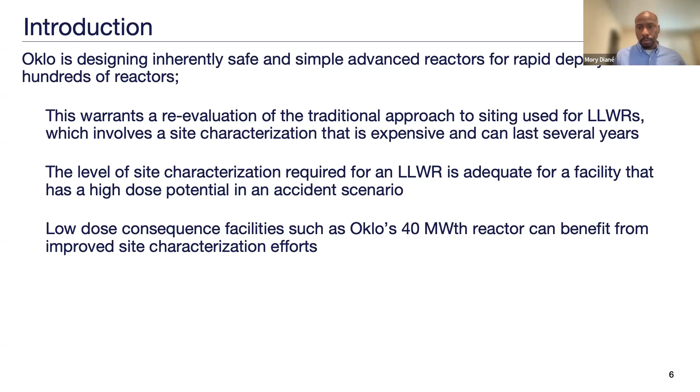However, for low dose consequence facilities, such as Oklo's 40 megawatt thermal reactor, those type of facilities can benefit from improved site characterization efforts. And we'll talk a little bit more later about the dose consequence. So Oklo's methodology was provided to the NRC via a white paper, which was submitted in November 2023, following several discussions and meetings that we had with them, and we also had some meetings after submitting the white paper. The methodologies provided in that white paper are focused on three key aspects.

Basically, the goal is supporting the safe deployment of Oklo's reactors to those who want and need clean heat and electricity the most. The criteria is ensuring seismic categorization and site characterization is commensurate with the reduced risk of the facility while ensuring compliance with the regulation. And as a result, we want to be paving the way for a flexible approach to siting, supporting the low dose consequence facilities due to their small inventory, passive safety, and also robust design.

And something I wanted to state before moving on from this slide is that there are precedents to the methodology that we presented to the NRC, starting with light water reactors' non-safety structures, systems and components, also for non-power reactors, research and test reactors, medical isotope facilities, which are all regulated by the NRC, and also DOE facilities, all of which follow a much more streamlined site characterization process when they have lower radiological risk, and this is adequate for their workers and members of the public.

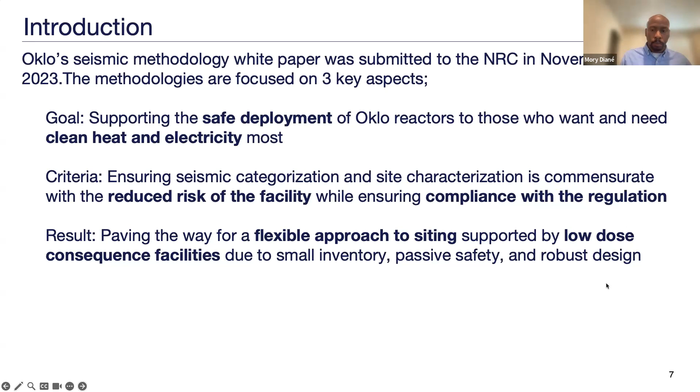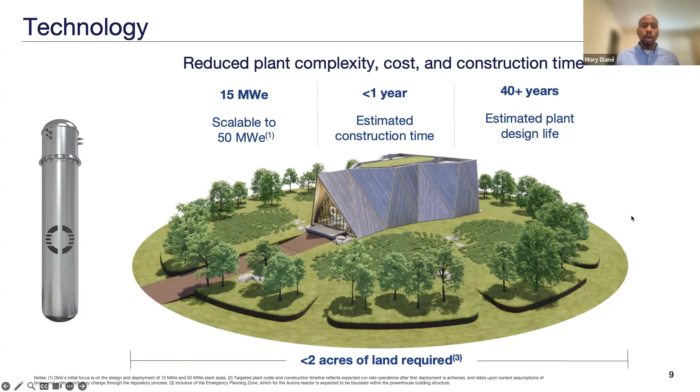Okay, so the technology that we're working on really helps reduce plant complexity, cost, and also construction time. We are working on a fast reactor design. So I'm going to move on to the next slide to give you an example. In terms of fast reactors, we have over 400 reactor-years of operating experience across the world. Oklo specifically uses data from the Experimental Breeder Reactor 2, that's EBR-2, which produced about 20 megawatt electric and was operated for 30 years by the Idaho National Labs, from 1964 to 1994.

The EBR-2 was a liquid metal cooled fast reactor, so it didn't use water as a coolant. This allows the coolant to operate at higher temperatures and lower pressures than current reactors, improving the efficiency and safety of the system. So fast reactors use a fast neutron spectrum, meaning that neutrons can cause fission without having to be slowed down first, as they are in light water reactors. This allows them to use both fissile material and spent fuel from existing reactors to produce electricity.

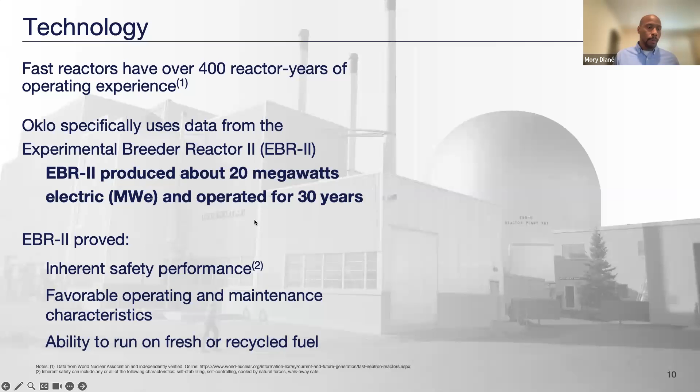So we'll go through the regulatory overview. Again, this is the part that we'll spend the most time on. We'll take questions at the end after I go through the regulatory overview and the Oklo methodology. So we'll start here with 10 CFR Part 50 Appendix S, which ensures that structures, systems and components subject to the safe shutdown earthquake, SSE, remain functional. The SSE is the maximum seismic acceleration the safety-related SSCs can handle without failing. This is the seismic design basis accident. It is not a beyond design basis accident. Essentially, safety-related SSCs need to remain functional when subjected to the SSE.

The next regulation is 10 CFR 100.23. That's the geologic and seismic siting criteria, which ensures seismic site suitability through site investigations that account for uncertainty to allow for the selection of the ground motion response spectra, GMRS, and the SSE. So the key difference here is the GMRS is the maximum acceleration that is specific to the site, while the SSE is the maximum acceleration that the design can withstand. The values do not have to be equal. But when they're not equal, the SSE must envelope the GMRS.

And then finally, we have 10 CFR 50.34, the contents of applications, technical information, which prescribes a dose threshold of 25 rem that should not be exceeded. This accounts for mitigation. So when mitigation is applied, that 25 rem dose should not be exceeded. That's within 2 hours at the site boundary. And they are within a combined license application under Part 52.

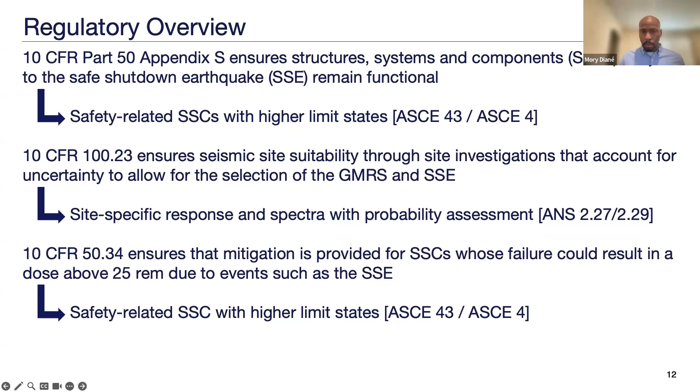All right, so here we wanted to talk a little bit more about the uncertainty piece. So we've quoted the portion of Part 100.23, 10 CFR 100.23, that talks about uncertainty. So we can see here that 100.23 wants to identify what the SSE is, but it wants to do it while accounting for uncertainty. And we can also see that there is a caveat where the probabilistic seismic hazard analysis is not a requirement. It is a choice that is provided because it says such as. So the alternative would be to use

suitable sensitivity analyses. Through our discussions with NRC, the recommendation that was provided was to perform PSHA, the probabilistic seismic hazard analysis, with a lower level SSHAC. Basically the SSHAC is the Senior Seismic Hazard Analysis Committee that would be implemented to perform validation and peer reviews.

So you have the different levels here that we showed. You don't have to read through all of that, but there's level 1 through 3, and then, I'm sorry, through 4. 4 is not shown on this table, but level 3 and 4 would be what a typical large light water reactor would be performing, and what NRC had recommended for a lower dose consequence facility through our discussions would be potentially a lower level, maybe level 1 or level 2.

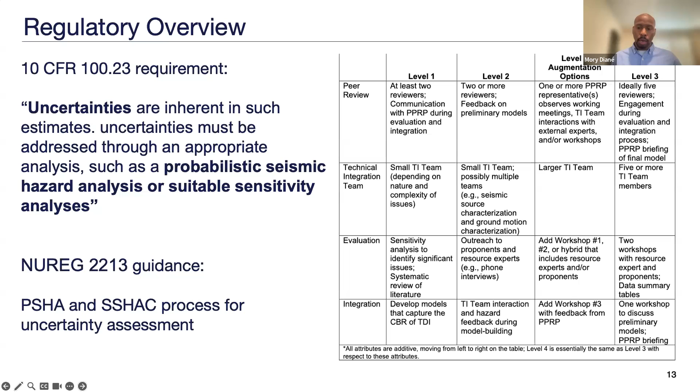Based on what we investigated, it was related to EPRI and Lawrence Livermore National Labs, LLNL, PSHAs that were performed that had significantly different results for the same area. And since then, NRC has wanted applicants to properly capture all levels of uncertainty, aleatory and also epistemic uncertainties. We'll go through more slides on the uncertainty piece, because that's very important in terms of how to characterize it.

So we have some quotes here from DG-1410. That's the seismic reg guide that NRC is working on. It's currently draft for Part 53, which really opens the door for a lot more options for reactors other than large light water reactors, because as we will see in some of the next slides, the current regulation, Reg Guide 1.208, is really focused on large light water reactors of a high dose consequence.

But the DG opens the door for potentially lower dose consequences, which can be handled through option 3. And we have a quote here. So this proposed option allows the use of a variety of performance and risk analysis methods besides a traditional SPRA to demonstrate seismic safety. SPRA would be the seismic probabilistic risk assessment. Typically, that's used to determine the safety classification, seismic classification of the structures, systems, and components, SSCs.

We also have within that guidance that option 3 would allow for a much more streamlined approach. So it says a combination of approximate bounding and conservative analyses and quantitative risk. So it's not prescribing an SPRA specifically. There's an alternative there.

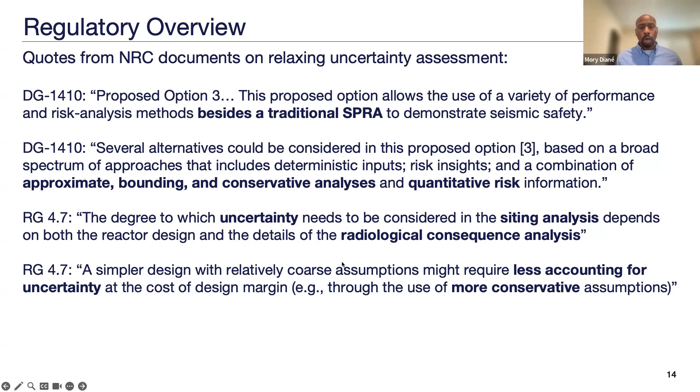And it says that this would be for the design of low-risk facilities, and it has in parentheses microreactors or special systems of relatively low risk, and the regulatory framework for them is evolving. So these are all providing some flavors that indicate that for a lower dose consequence facility, a different approach than what's been used for large light water reactors would be possible.

So we're now getting into the seismic design category. So the SDCs are a type of seismic classification that is assigned based on unmitigated dose potential for basically the failed state of the safety-related SSCs. This would be following American Nuclear Society Standard ANS 2.26-2004, which is the categorization of nuclear facility structures, systems, and components for seismic design. And this was last issued in 2017.

So here we're showing the different SDCs, 1 through 5. Again, 5 is what Reg Guide 1.29 defaults to for large light water reactors. And we have all the way down to 1, where 1 is 0 rem, and then you have 5 with 100 rem dose. So under the ANS unmitigated consequence analysis process, those will be the doses considered based on Appendix A. And you can see that this is unmitigated. However, the NRC dose threshold of 25 rem that should not be exceeded is mitigated. So it accounts for all mitigation.

So you can see clearly here that if you are an SDC 5 and you are at 100 rem unmitigated, then certainly you need to mitigate that to get much below 25 rem, as far below 25 rem as possible. So in that case, limit state C or D that we talked about earlier would be needed in order to make sure that you can maintain elastic behavior, or deformation such that the safety function of the SSC is maintained.

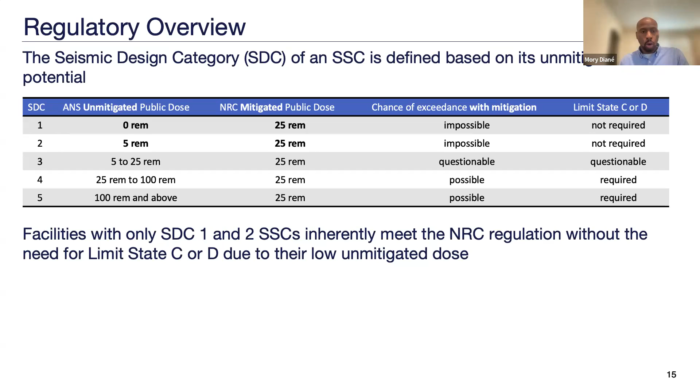This table here is from NUREG-2117, which talks about the PSHA and SSHAC levels 3 and 4. This table goes over 3 levels of SDCs. Something I wanted to caveat here is that this table comes from ANS 2.29-2008. The latest version of ANS 2.29 took out this table. However, it is still in the NUREG

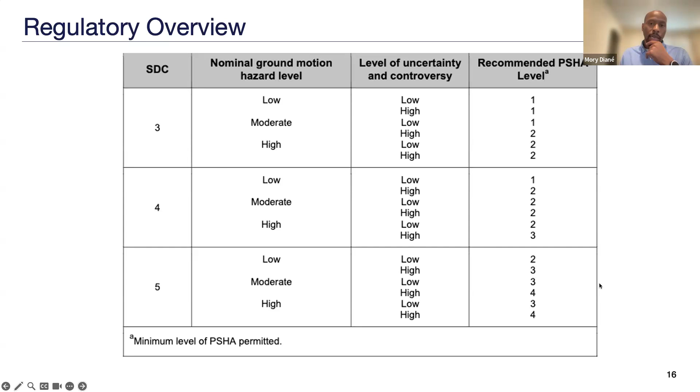2117. And you can see here the rationale is if you're at an SDC 3 level, you can benefit from a lower SSHAC, a PSHA and SSHAC level 1 or 2. And they have some conditions there. However, you can see that SDC 1 and 2 are not even listed in the table, which implies that if you're an SDC 1 or SDC 2, then technically you don't need to do a site-specific SSHAC or PSHA.

So really what would be recommended, to make sure that you are conservatively designing your facility, if your facility just has SDC 1 and SDC 2, would be to do confirmatory site investigations with the use of regional seismic data. So basically confirming regional seismic data, which would come from the United States Geological Survey, the USGS.

And the USGS performs regional PSHAs for the entire United States as part of their latest seismic hazard model. They performed a SSHAC also following NRC guidance. I'm unclear as to what level SSHAC was performed, but this comes directly from the report that they issued, the 2018 update that has the overview of the model and implications. It does have a line in there that they performed a SSHAC also. And we'll talk a little bit more about the USGS later.

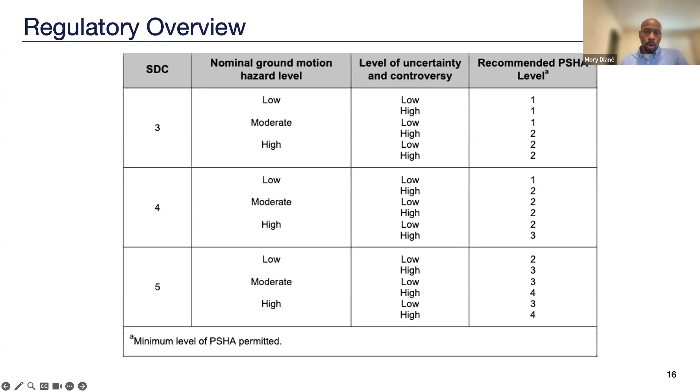There are also some flexibilities. So here we're looking at a slide from an older version of ANS 2.29. There is also some flexibility for lower SDCs with ANS 2.27, which looks at the site investigations for SDC 3 and below. There is some flexibility there in terms of what might need to be done.

So with this slide, we'll compare SDC 1, 2, and 5 to show that it wouldn't necessarily make sense to design an SDC 1 or SDC 2 to the level of an SDC 5 if your facility only comprises SDC 1 and 2. And the reason we keep bringing this up is because the current guidance that's available for power reactors under Part 50 and 52 points you to SDC 5 under Reg Guide 1.208, and that's why we keep trying to make the distinction between SDC 1 and SDC 2 for very low dose consequence facilities.

So here we can see the dose, we talked about the dose before, with the 0 rem all the way up to 100 and 500 rem for public and workers respectively. These SDCs are tied to different recurrence rates in terms of the earthquakes and also the probability of unacceptable performance in terms of failure. And the SDC 5 level has much lower probabilities, which leads to higher seismic events, which would obviously be a worse consequence for an SDC 1 and 2. It wouldn't make sense to transpose that onto an SDC 1 and an SDC 2. So that was the key that we wanted to get out of these slides.

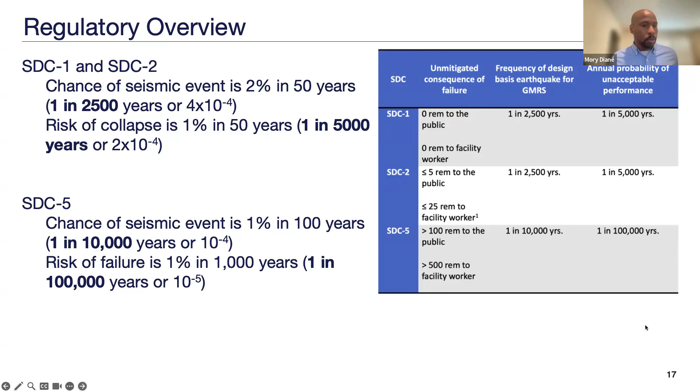All right, let's move on. So we're almost at the end of the regulatory slides. So here we have Reg Guide 1.29, which establishes Seismic Class 1 for safety-related components. And then you have Reg Guide 1.208, which kind of reconciles what SC1 is compared to the SDC. So it basically sets SDC 5 as SC1, and it does that through endorsing part of the methodology from ASCE 43-05, and it is used for site characterization of SDC 5 to select the SSE, as we talked before, or the GMRS, the ground motion response spectra.

We also have NEI 18-04, which is endorsed by the NRC, for non-light water reactor design and licensing. It is an alternative that will certainly work for some advanced reactors. However, again, based on the RIL document that I quoted earlier, the research information letter. So this is not a quote from Oklo. This is a quote from the research information letter.

It states that it is envisioned that some of the very small advanced reactors and microreactors with negligible off-site consequence can seismically design in accordance with ASCE 7, and then it says LMP, which is the Licensing Modernization Project per NEI 18-04, would impose an additional and undue burden in the reactor design process. So essentially for those very small or low dose consequence facilities.

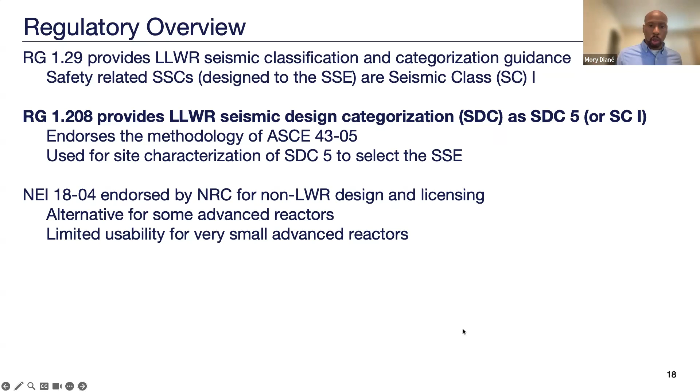So the reason I had highlighted Reg Guide 1.208 earlier is because even though Reg Guide 1.208 only points to SDC 5 for power reactors, there is a pathway from Reg Guide 1.208 to the USGS data, and that's what we wanted to show here. So basically, it endorses part of the methodology from ASCE 43-05. It hasn't been updated yet to ASCE 43-19, so it's still looking at ASCE 43-05. And so if a designer is stuck here and saying, well, do I need to design my very low dose consequence facility to SDC 5 requirements? Then they would go to ASCE 43 and see what else is there.

And going to ASCE 43-05, they will note that for SDC 1 and 2, there is a direct pointer from ASCE 43-05 to ASCE 7 and the International Building Code, actually. So maybe there's a missing arrow there, but it points you directly to, for SDC 1 and 2, you can use ASCE 7 and you can use USGS data.

There's an alternative path because ASCE 43-05 does not give you the criteria for selecting the SDCs. As we talked about, some designers use SPRA for that. However, when you're using ASCE 43-05, it tells you go to ANS 2.26 for the selection of your SDCs, and that's done through an unmitigated dose consequence analysis.

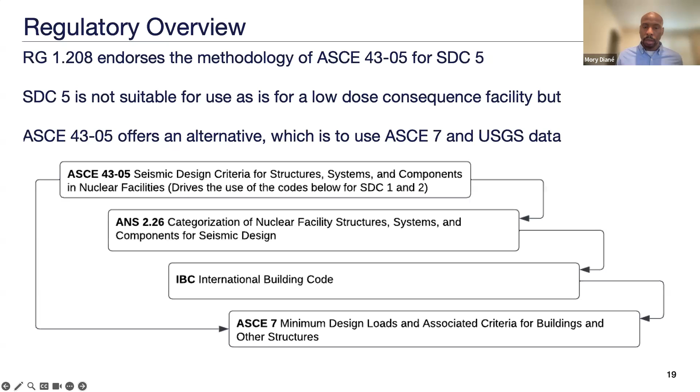So if you imagine a transportable reactor that is meant for an emergency situation, and they have to license and also go through lengthy site investigations, by the time they're done with that, the emergency has long run its course. So we need a more flexible approach to be able to rapidly license, perform the site investigations, and deploy these advanced reactors, including smaller reactors. So we'll quickly cover Oklo's methodology. This won't take too long so that we can open up for questions.

So basically, the methodology that we have looks at two items. The seismic design categorization, which is informed by ANS 2.26. Again, we don't adopt every single guidance in there, and there's a reason why we don't do that. We'll talk about it a little bit with those bullets. And then there's also the seismic site characterization, which is informed by ASCE 7. So again, if something within the guideline does not make sense for the reactor, then we would have to adjust it accordingly. And that's why we have these as informed rather than endorsed.

So for the seismic design categorization, we perform the unmitigated consequence analysis that is discussed in ANS 2.26. Essentially, we fail the SSCs that have a safety function, or that have a radionuclide release potential, and we assess the dose at the site boundary over 2 hours. The dose that we're looking at here is the 5 rem and 25 rem. So 5 rem for the public, unmitigated, and then 25 rem for the workers, unmitigated. Those are from Appendix A of 2.26.

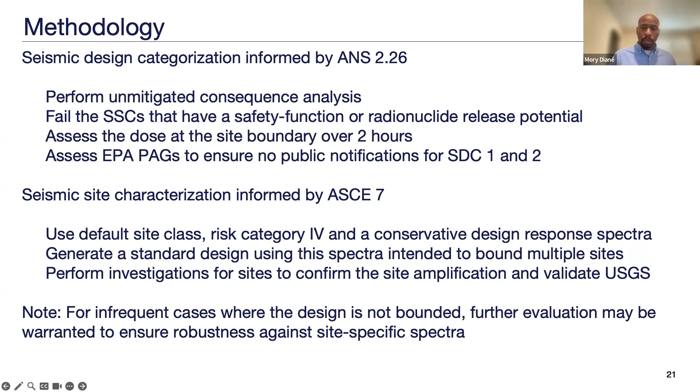And also something to note is that even though we talked about limit states earlier, C and D not being required, we would design our reactors to be robust. And this is how we basically include sufficient conservatism to mitigate any concerns with uncertainty based on what we discussed earlier. With that, let's go into the takeaways, and then I'm going to wrap up and let anybody who has questions ask some questions.

So the methodology that we have in the white paper is appropriate for SDC 1 and 2. One key factor that we have here is that following the ANS process that we discussed, the unmitigated dose consequence analysis is really our ticket into ASCE 7. We won't allow ourselves to use ASCE 7 or the USGS unless we're able to validate that the SSCs are SDC 1 and 2. If we end up with higher SDCs, then we would have to look at a different methodology, basically.

But what we're presenting is supported by precedents. As we talked about, several precedents use these methods or these codes and standards. It is also supported by industry codes and standards, where we showed you the pointers to ASCE 7 and the USGS. And based on our read of the regulation and what we demonstrated earlier, this process would meet NRC regulations for these lower SDCs or low dose consequence facilities. And this really results in streamlining the site investigations, the cost, the time needed for those. And it also streamlines the acquisition of seismic loads, where you can obtain them from the USGS and then do a confirmation of that data.

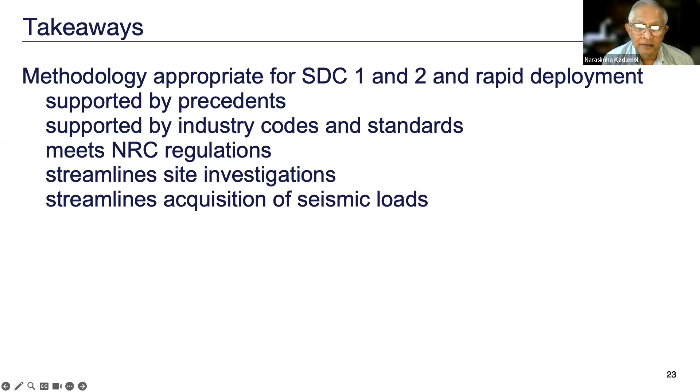Sure. That one hopefully is an easy one. Just questioning what the title or perhaps the topic of DG 1410 is.

DG 1410 is the draft regulatory guide that is essentially the equivalent of Reg Guide 1.208, which is currently the regulatory guide that looks at the seismic design for large light water reactors or current plants that are designed or licensed through Part 50 and 52.

The DG is the reg guide for Part 53, which is still being worked on. And that's why it's still a draft guide. It's not been implemented yet, but there've been some drafts that we've seen over the years. So last year, I think, was the last that we saw a draft. And I know that NRC is working through some updates that they will share with the industry on that.

Let's see, there's another question on chat that just came up. Sure. So that's from our standards board chair, Andrew Sauter, and he asked if you can think of any of the industry standards in your area that could or should be improved via revision.

Yeah, so actually there is a process right now, and I think ANS is probably leading that process, where you are asking the industry to look at a slew of guides, mostly codes and standards, in terms of which ones are useful and what would you change, and we provided a lot of input on that.

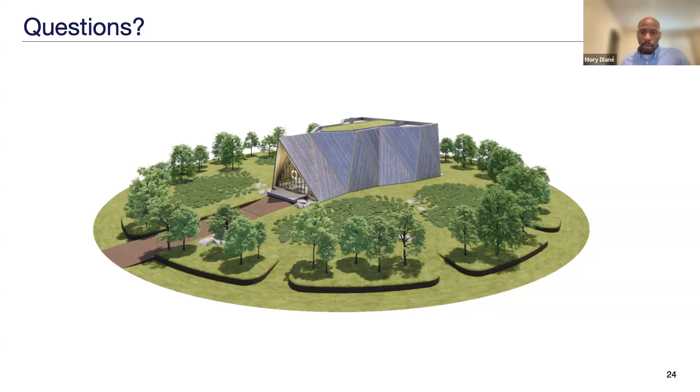Yeah, I don't have any specifics other than we're working through the licensing process for the Aurora, the design that I mentioned earlier, that is the 4 megawatt thermal, and we're having some good progress with that. And then also there is the work that we're doing to go public. But as far as specific dates within the 5 years, I think stay tuned, and we'll see where we end, and we're all staying positive with hopefully a good outcome for everybody.

Okay. Hey, thank you so much. Okay. Thank you very much, Mory. If people have any other questions, you're most welcome to send them to Pat, and between my committee and reaching out to Mory if needed, we'll try to answer any questions you have.